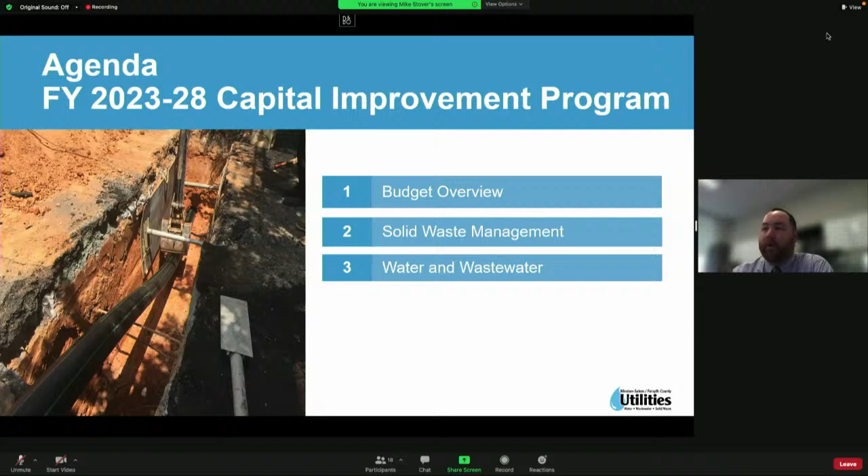We'll start off with a budget timeline. The budget cycle kicked off in January. We compiled our budget request from all the divisions, sent it to the budget office back in February. We're in March, presenting the CIP plan today. As Courtney mentioned, in April next month we'll present the operations budget with any recommendations. In May, the Utilities Commission will vote on that and adopt rates for the next fiscal year. Then in June it'll go to City Council to formally adopt the budget and appropriate funds, which will take effect July 1st.

Here is a basic overview of the capital improvement plan. It includes all individual capital projects and major studies for the utility over a 6-year window. Down at the bottom is an example, and you'll see plenty of these moving forward today. In blue is the appropriations that we're requesting for the upcoming budget year. The next 5 are planning years that will likely change; they're just forecasts that we put in there with the information we know at the time.

As Courtney mentioned, the capital improvement plan is funded via 2 primary sources: PAYGO, which is cash on hand, and I believe—Lisa can correct me if I'm wrong—we've been funding around $30 million in PAYGO, and the rest is made up of revenue bonds and state revolving fund loans.

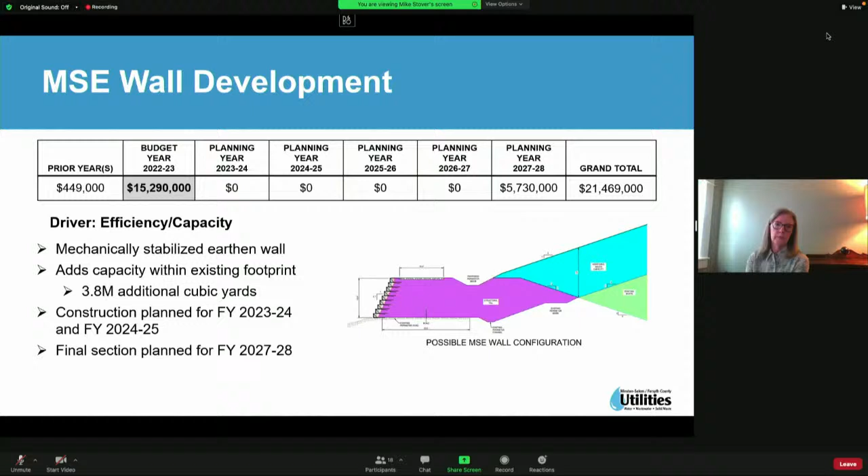So also in FY28, we are planning to construct the remaining lined cells at Hanes Mill Road Landfill. That $13.03 million is to construct phase 3, cells 6 and 7, which would be the last horizontal expansion under the current permit at Hanes Mill.

Chris: Jan, do you have any idea how many yards we'll have in 6 and 7? Jan: In 6 and 7 alone, it's hard - I'm not sure I know offhand. It's always hard to parse out by cells because you get some capacity overhead. Basically, you can vertically expand - once you expand horizontally, you can also go up. So it's a little bit difficult, but I think there's 12 million cubic yards in the landfill as it's permitted today. Chris: Okay, so it would be a good portion of that 12 million. Thanks.

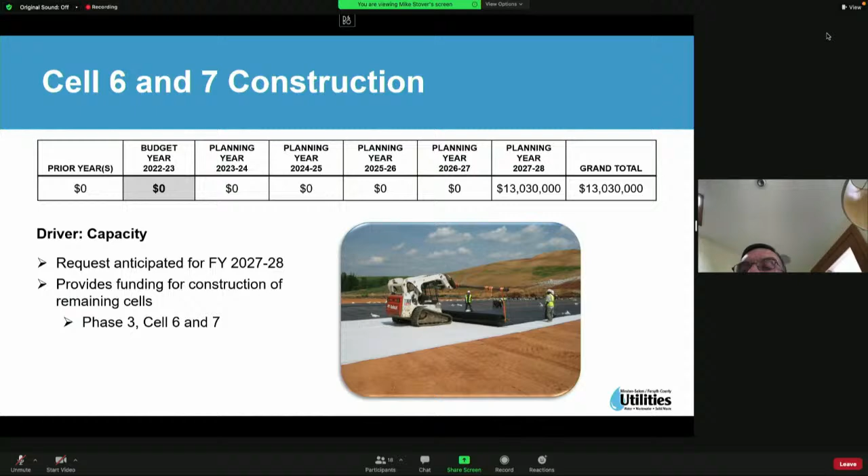On the next slide, I have the same aerial you've seen before, but it's a visual layout that helps you visualize how this is going to work. The solid blue line shows cells 1 through 5, which is where we've currently constructed those cells and we're working there now.

The green dash line is the first portion of the MSE wall, much larger than the dark pink dash line, the second portion, which is the 5.73 million. The light blue is the part you bring in when you do cells 6 and 7. That's the reason for doing it in stages, because you can't really build that last portion of the wall until 6 and 7 are built, or you could build them together.

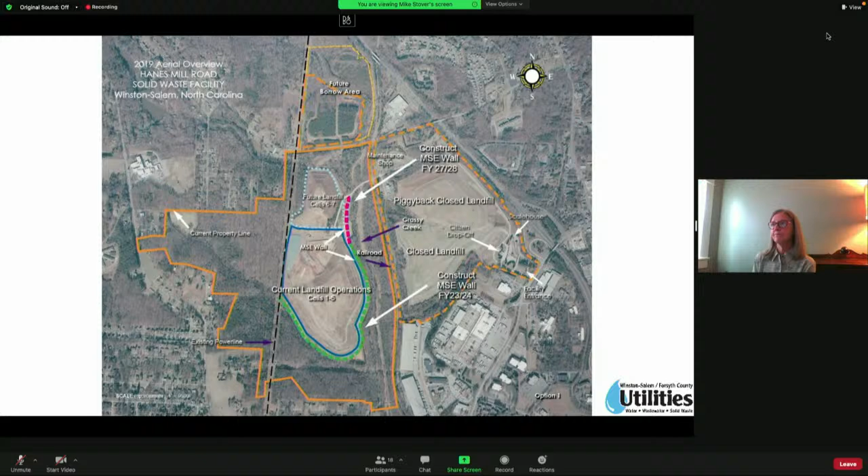So those are the major projects, although these next four, which are relatively new, you may not have seen before, altogether equal the over 2 million you saw in the summary slide. But each one individually is a little bit smaller.

This first one is to repair and replace some of the asphalt pavement at our facilities. Much of it is aging and needs repair and replacement in some cases. We're requesting $600,000 for the upcoming fiscal year, $410,000 in FY24, and $260,000 in FY25, for a total of $1.27 million for pavement work.

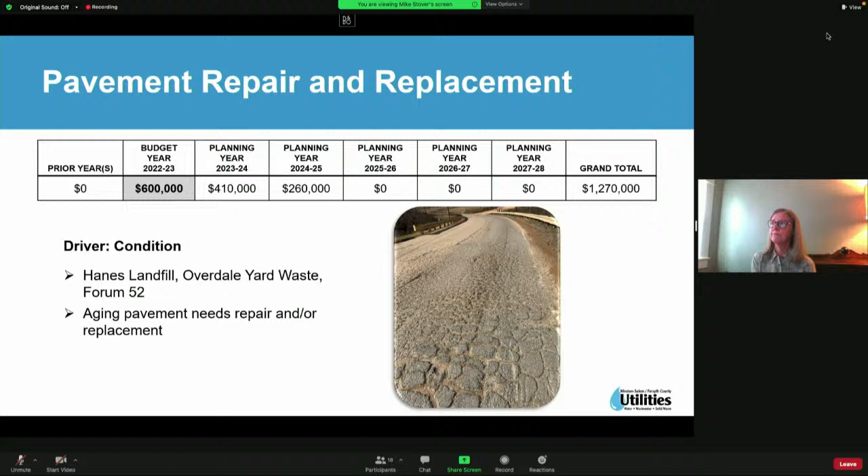The next project is the front entrance reconstruction, which was discussed in the March meeting. DOT is widening Hanes Mill Road, and it will impact the entrance to our facility. We'll have to replace the gate, fence, landscaping, and that type of thing at the front. Our engineering estimate for replacing that infrastructure is $280,000, and we're requesting appropriations for that.

You might also remember the DOT offer to reimburse us was $230,000. So there is a slight difference between those two numbers, but we think it's important to appropriate the amount that the consulting engineer estimated for the project.

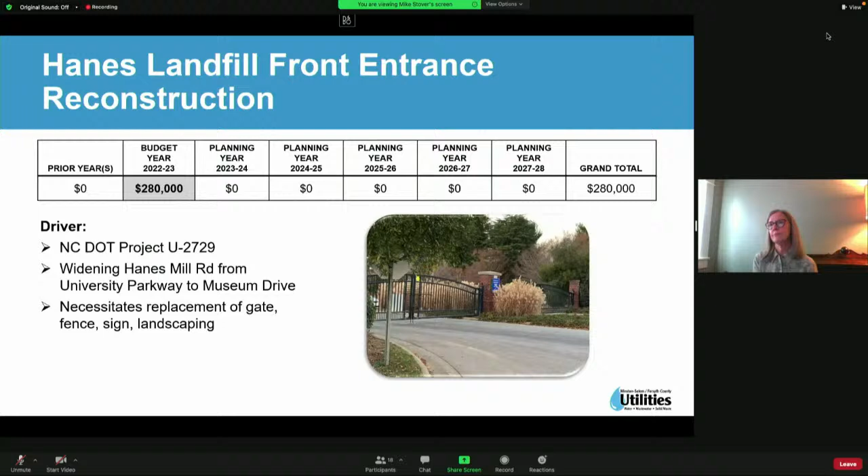Hanes Landfill has a dual scale system nearing 20 years of age. It was installed in, I believe, 02 or 03. We're seeing increased maintenance and repair costs, and we've been advised they're reaching the end of their service life. So we've budgeted $600,000 to replace both sets of scales and do some work on the foundation and the pit underneath the decking.

It's important for a couple of different reasons. There's a regulatory requirement to weigh your waste accurately as it comes in, and of course we want to bill our customers appropriately and charge them accurately as well.

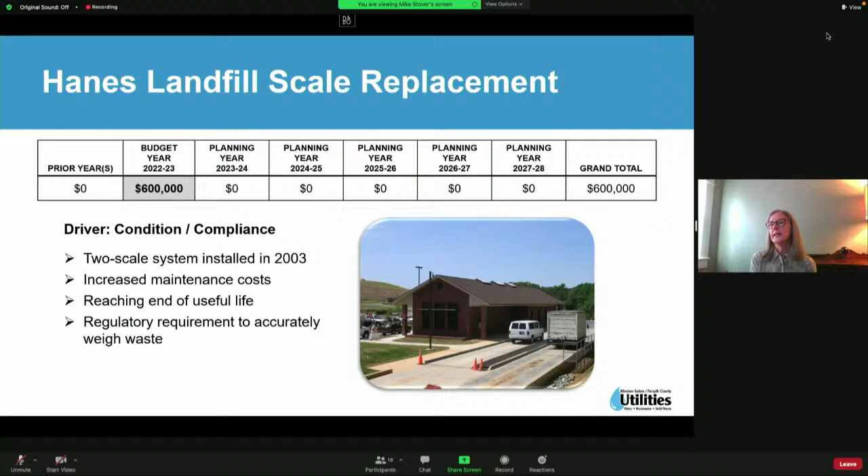We just have one more. The landfill leachate system is the system that collects the water that comes in contact with waste within the landfill. It's treated as wastewater, and the original components, some of that system dates to 96 or 97, I believe.

We've upgraded some pumps and control panels and components throughout the years, but it's been kind of a piecemeal approach. So we would like to do a comprehensive upgrade of all the electrical components, flow meters, pumps, those sorts of things, so we can extract good data on how much leachate is being generated and where. The quality and quantity of leachate is important for us to know. $580,000 is the requested appropriation for that work.

This would cover all of the system not impacted by the upcoming wall construction. The pieces that would be demolished or replaced in the construction of the wall are not included here; they would be in that budget, but this is everything else. So $580,000 total there. I think that's our final project today, so be happy to answer any questions on any of those.

Hey Jan, this is Chris. The front entrance construction or reconstruction, did we have that estimate when we were negotiating with DOT?

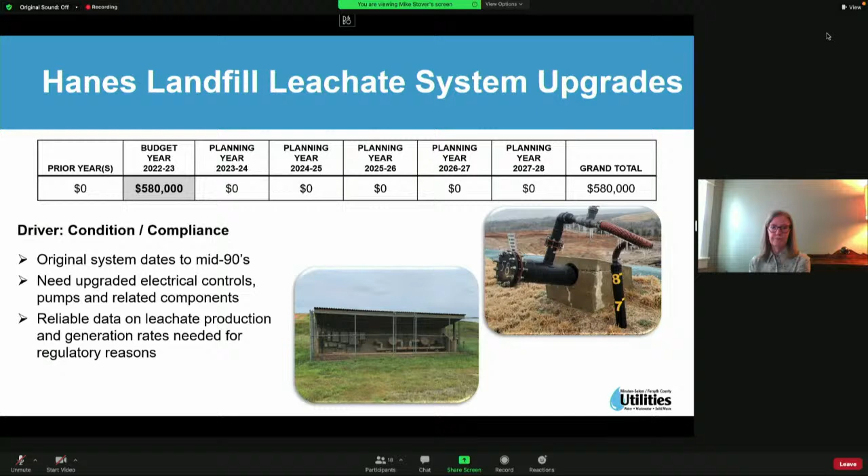Thank you, Jan. Thank you.

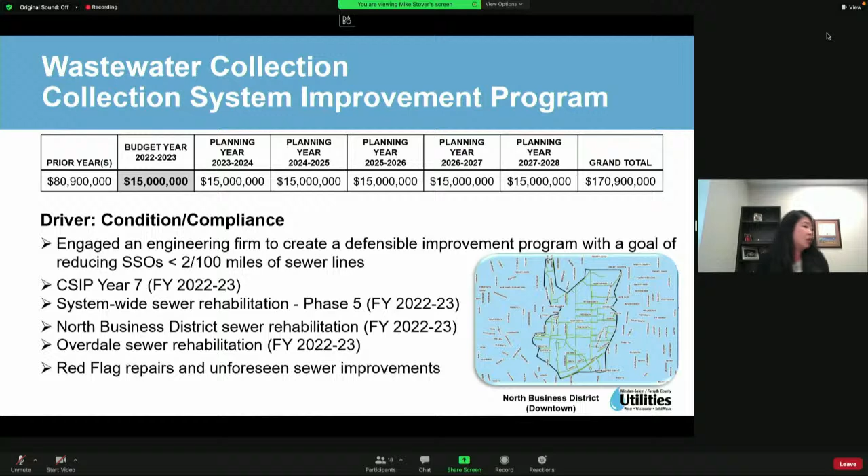Thank you, Shane. We've got a couple of slides to highlight the success of the CSIP. Since the CSIP started, we've seen a 40% reduction in the number of sanitary sewer overflows, and we're expecting another record low this year. We had a good month in February; March we've seen an uptick, but last I checked, we're still well below where we've been the past couple of years. So we're currently on track to hit around 61 SSOs.

A large portion of the CSIP program includes the full condition assessment. So far, we've done 27% of the system. Out of 1,800 miles, that equates to roughly 475 miles of pipe that we've physically stuck a camera in and looked at. We've inspected the 17 worst condition sections of the system, shown in red and orange, which as you can imagine are the oldest sections of town. There are a couple of pictures on the right of the Tanglewood force main, and Shane will show you some pictures of that later in the presentation. The Tanglewood force main replacement design is included in the CSIP funding as well.

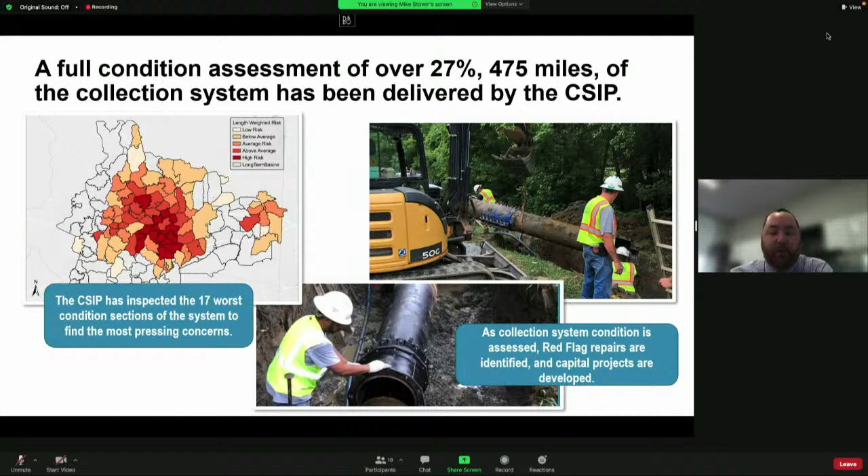Mike, this is Wesley. I think this has been one of the best programs since I've been involved in utilities, as a prevention measure. You're spending money, but down the road it just pays off big time, and it only gets better. So that's good, it's been a great program.

Well, I really appreciate you saying that, because we're in year 6 right now, and it's been a lot of work, a lot of meetings. Luckily it's paying off, and we're seeing some good numbers.

For sure. So Mike, just to give us perspective, before we started this program, how do we make determinations about capital projects like we are now? Just give us an idea.

What did we do before? We've done a couple things as far as capacity projects. What we did, we went based off the latest master plan. Just a quick example of what we've done differently since then: we still take what's in the master plan, but instead of just going out there constructing that, we field verify. So we add some flow meters, we reconcile those numbers and make sure that project needs to be done right now, or maybe it can be deferred a couple of years. And we've had success deferring some projects.

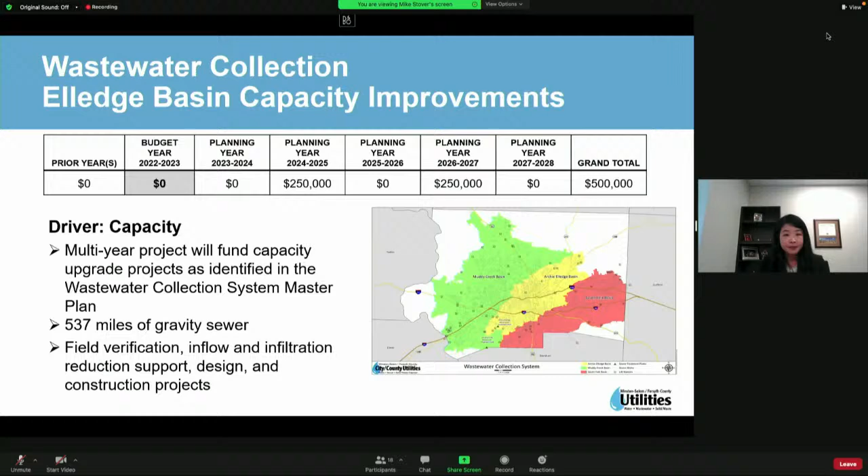Facility improvements, we are requesting $250,000 that will help fund miscellaneous improvements at UFO. For this upcoming fiscal year, we are requesting to upgrade their security system, like the security cameras and security cards, and painting and new flooring for the utilities field operations. There you can see the building.

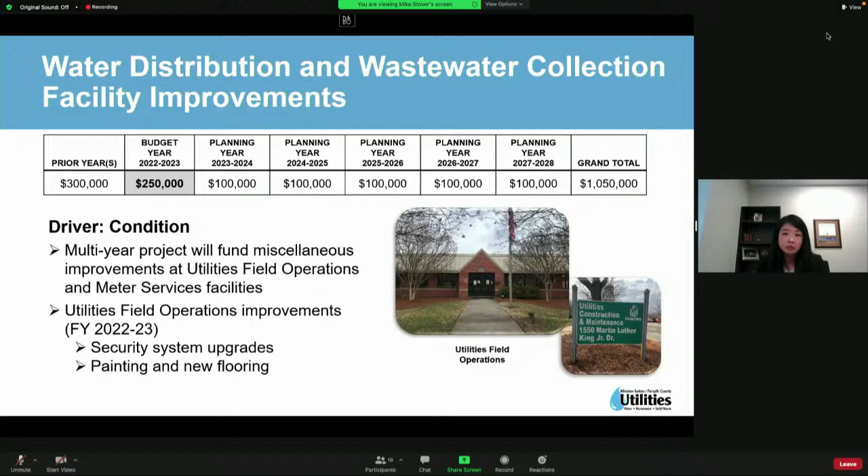Lift station replacement and improvements. We are requesting $4.5 million for FY23 to help with the design and construction of the new Lewisville lift station. We are asking for appropriations, but the design and construction of the new lift station will be reimbursed by Lewisville. Here you can see a picture of the existing very small lift station that's at the same shopping center as Food Lion.

Are we going to be expanding our customer base through this upgrade? Are we going to be extending sewer lines somewhere else that's not there now? Yes. This is a project that was identified by the town of Lewisville. They are going to pay the cost of the relocation, and it will basically move this lift station downstream, increase capacity, extend some gravity sewer lines, and the ultimate goal is to serve the Great Wagon Road, which they're currently working with DOT on.

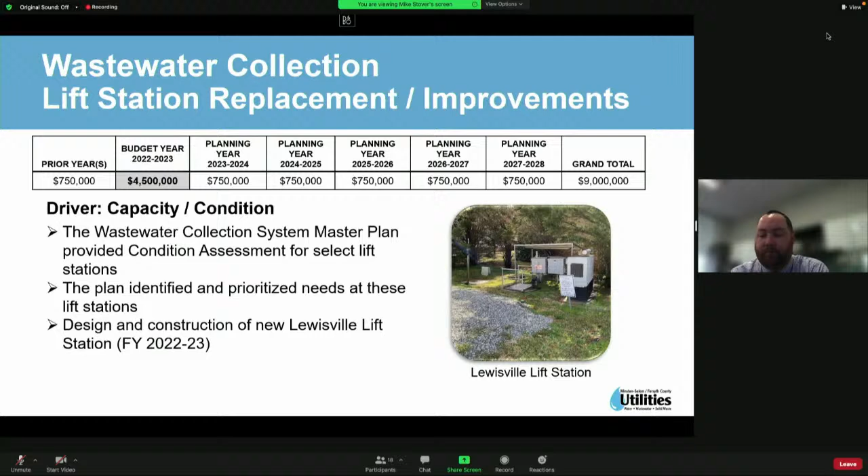Similar to the Elledge Basin, we don't have any capacity projects identified for Muddy Creek Basin for this upcoming fiscal year, so we are not requesting any appropriations.

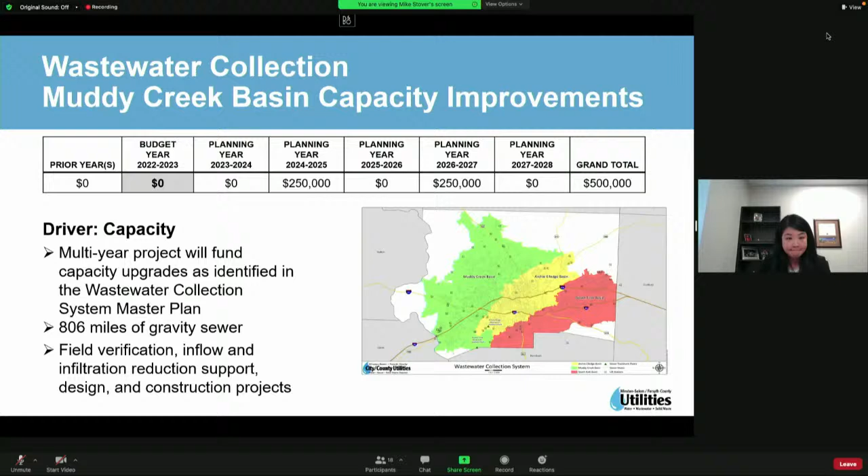DOT utility relocation projects. This project helps us relocate utilities that are located within the DOT right-of-ways. The current projects include the Northern Beltway Eastern section, with other projects that we can maybe identify later.

Similar to the other two. Shane, it's Chris. On that previous slide, how good are we at estimating this? What's our history on it?

Are you asking about estimating the budget that we need for this upcoming year? Yeah, in the past, when we make an estimate for NCDOT road widening, how close are we coming in our estimates on an annual basis? Well, some of these are projects that we know are going to finish up because we get the bill at the end of the project. DOT will send us the bill and we would pay it then. So Todd Lewis goes through and he knows which projects are concluding, and he pretty much estimates when the construction will be finished and when we will be receiving the bill. So pretty close, I would say. Yeah, Mr. Parker, this is one of the tougher ones that we have to deal with.

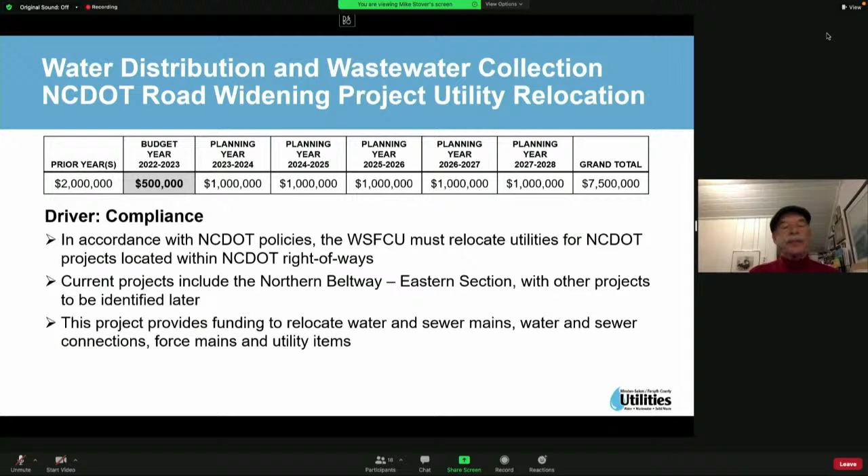South Fork Basin: we do not currently have any capacity projects for this upcoming fiscal year, so we are not requesting any appropriations.

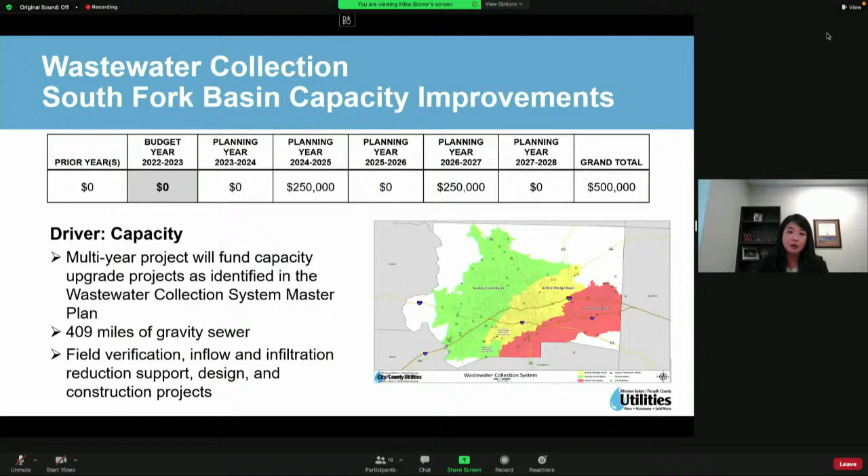Tanglewood Force Main is a new project for us. We are requesting $7.5 million to help with our aging and failing force main. The Tanglewood lift station and force main are critical assets to our wastewater system, and this will help fund the construction portion, which we hope to get started in FY24.

The picture on the left shows it spraying, from a leak this past February. I believe KRG came out and helped us put a sleeve on it, which you could see from Mike's presentation. The two pictures on the right are from failures in 2020 around Hampton Road. If you look carefully at the picture in the middle, the pipe is gone - this force main is in pretty bad condition.

This looks like a new project because I did not see it on the CIP last year - did we just not have it on the radar and it suddenly got elevated this year? This is one where we included the design work for the Tanglewood Force Main in the CIP last year, but not the construction, because we had to evaluate several things. Right now we're in the route selection process, and the number of failures we've had on this asset in the last 2 years are really high.

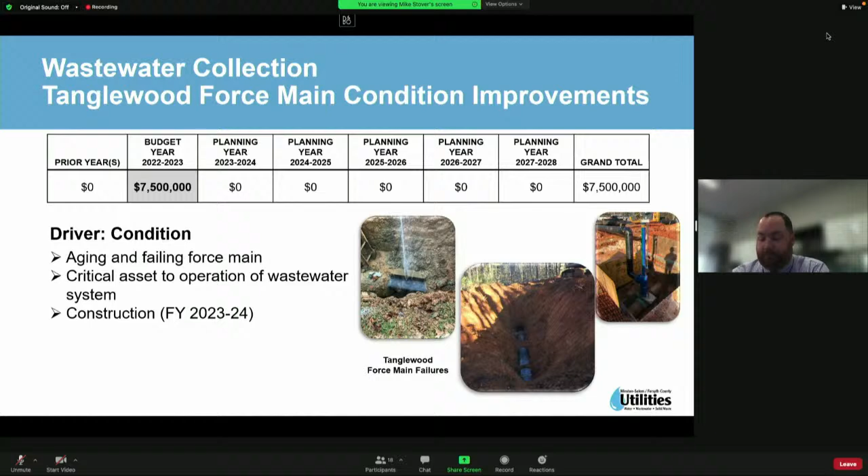Water distribution system improvements: we are requesting $10 million for this next fiscal year to help fund capacity upgrade projects identified in the water distribution system master plan. The master plan is something we're working on right now with HDR, I believe. This project will also help fund the water service line renewal, hydrant replacement project, valve condition assessment, the cross connection control inventory, and improvements associated with the lead and copper rule regulations.

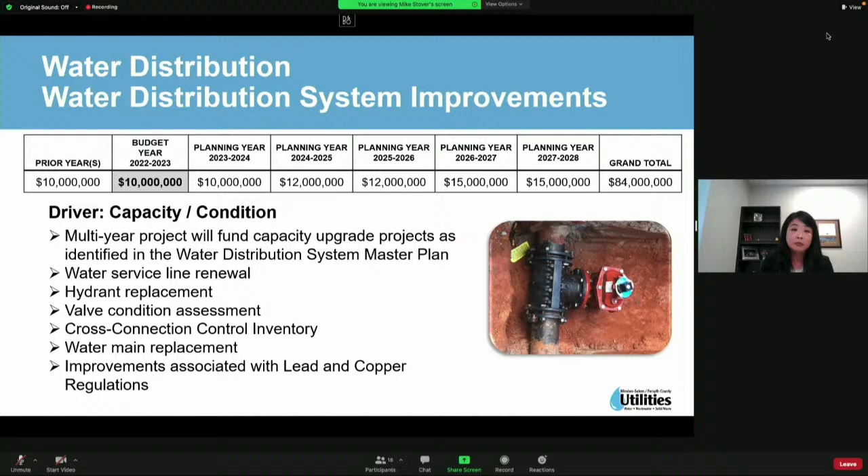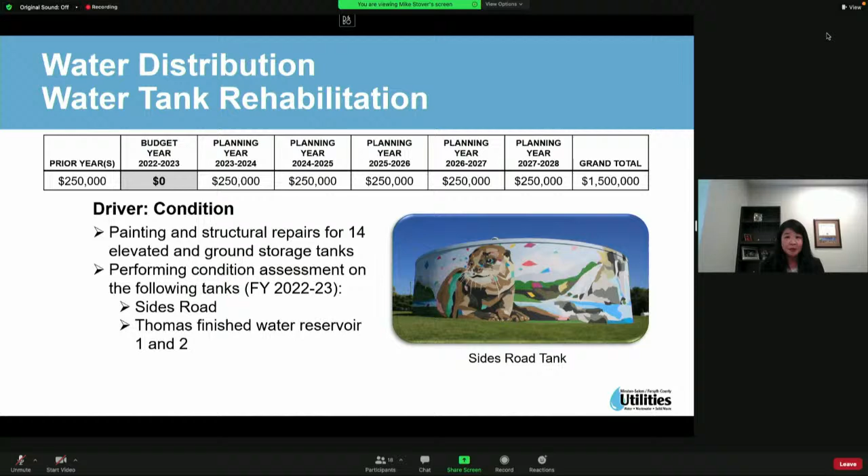Water tank rehab: we are not asking for any appropriations for next year. This project helps fund the painting and structural repairs for our 14 elevated and ground storage tanks. For this upcoming fiscal year, we will be performing condition assessments on Sides Road and Thomas Finished Water Reservoir 1 and 2, among others. Here you can see a picture of the Sides Road tank, and I've been told people are very fond of that otter.

Water treatment rehab and upgrades: we are requesting $500,000 for this upcoming fiscal year. That will help with replacement parts at the 3 water treatment plants, along with general building and grounds replacements. Also, this will help fund a structural evaluation study of the Idols Dam. The picture at the top is the Idols Dam itself, you can see the water flowing, and the picture at the bottom is part of the wing wall. If you can see, it just has structural issues, which is why we want to do an evaluation study. The bottom is all washed out.

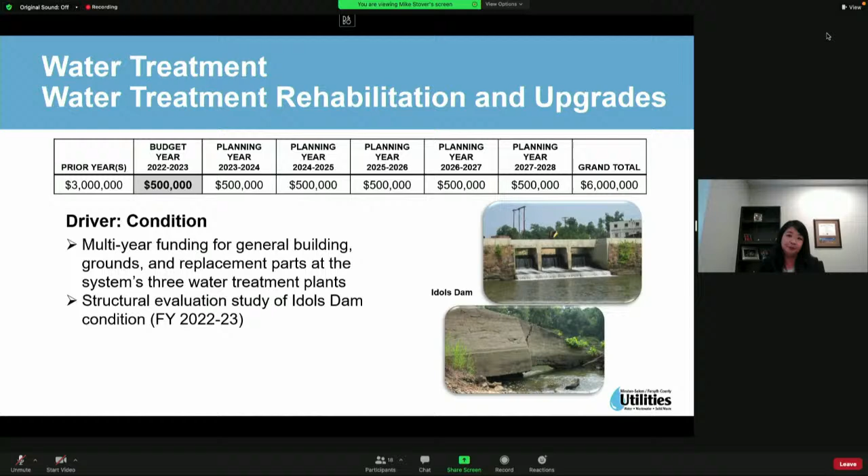For the biosolids drying facility, we are requesting $250,000 to help with maintenance and equipment for the facility.

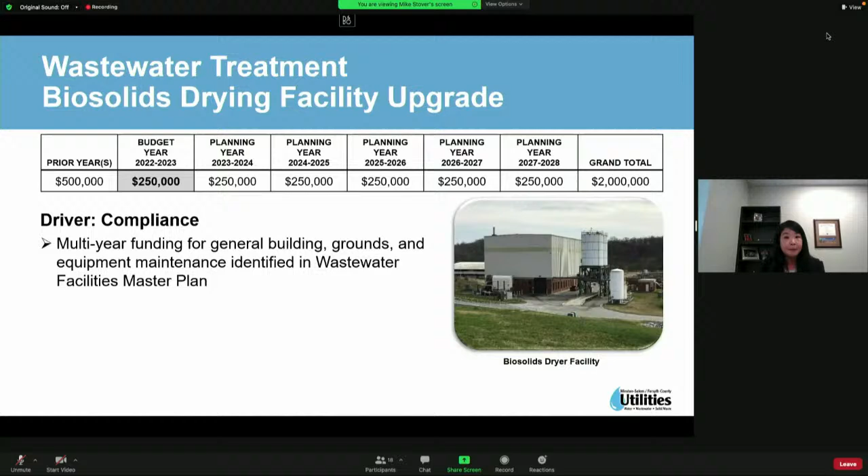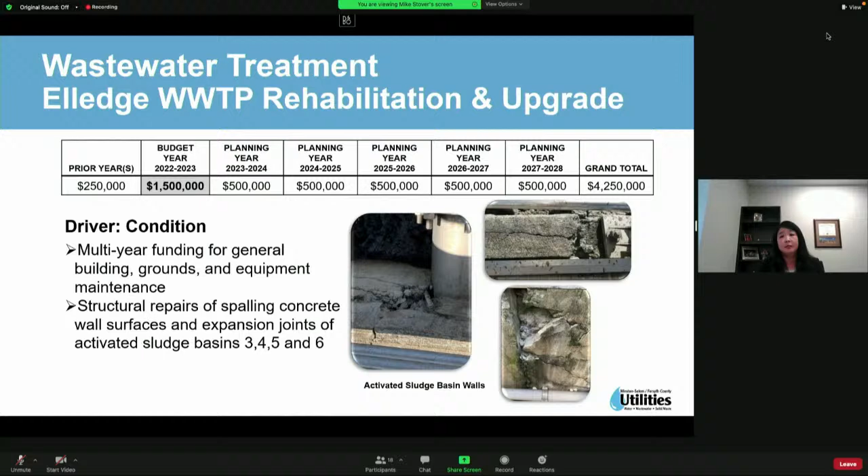I have a question with this. It seems like when we get down to some of these numbers that are $500,000, and we're doing repair and maintenance and that kind of thing, is that really a capital outlay? A lot of it will go towards purchasing of equipment, and a lot of those pumps are not cheap. Kind of our threshold, Mr. Long, is $50,000 or a lifespan of 10 years or more. So you could easily run into a pump that's $50,000, $75,000 in value. Well, but the fact that it is equipment explains how it applies to capital then. Correct.

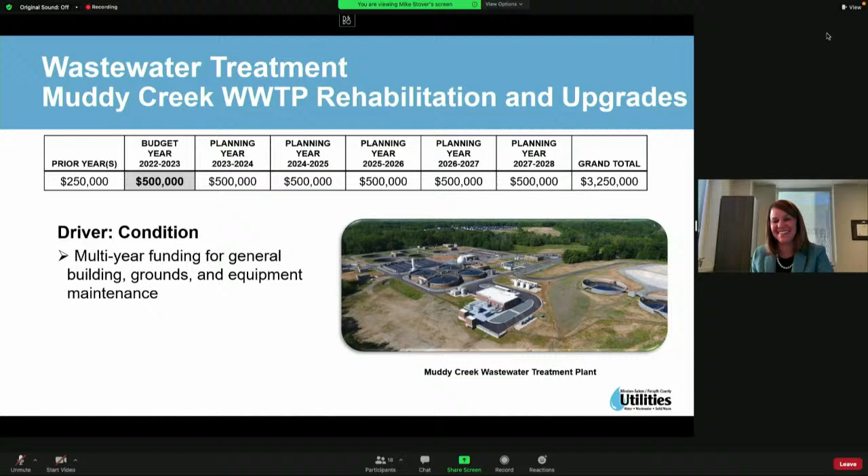Wastewater treatment plant expansion, nutrient removal. We are not asking for any appropriations at this time.

I'm not sure if we're going to get nutrient limits, but I think at that point we'll decide or figure it out. Is that correct? I'm sorry, I screw this up all the time. It's Courtney. That's right.

This is one that has been on the books for several years. We don't have nutrient limits yet, but the process is working its way through the state, and all the different committees that the state is presenting to, the EMC, the SAC, CIC, there's all this kind of process taking place. It is becoming more active than it has been in the past. The Yadkin Pee Dee River Basin Association has presented our comments to the draft plan, and so there's a lot of activity going on right now.

So we keep this on the books so that when we do get limits, we'll be ready to proceed. So Courtney, what I'm hearing is that Charles needs to be paying close attention to this, because he may be the only person on the commission currently who might be on there when this actually starts happening.

Oh, you never know, the department might move quickly. That's right, that's right. We have been dealing with this for years. David Saunders and Ron were very involved with this 10 years ago. And I know this has been part of the CIP for a long time.